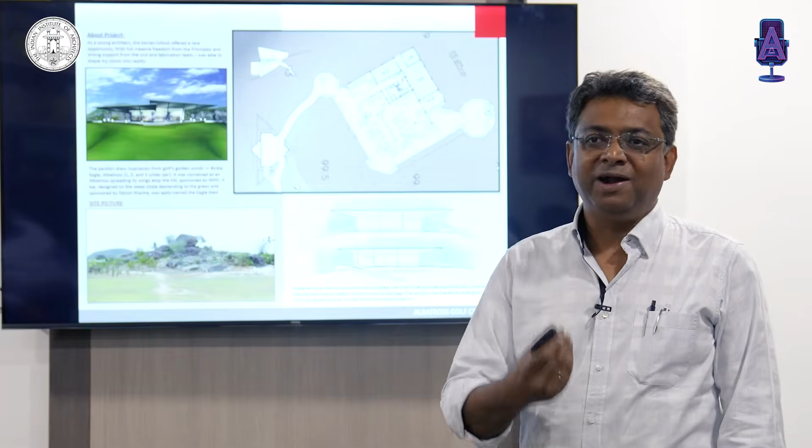So there are three golden words in golf: birdie, eagle and albatross — one below par, two below par, three below par when you are scoring. So this pavilion was designed as an albatross spreading its wings on top of a hillock, depicting the topmost score in golf, the albatross. It was sponsored by IMFA, and there was a small bar also which was sponsored by Falcon Marine.

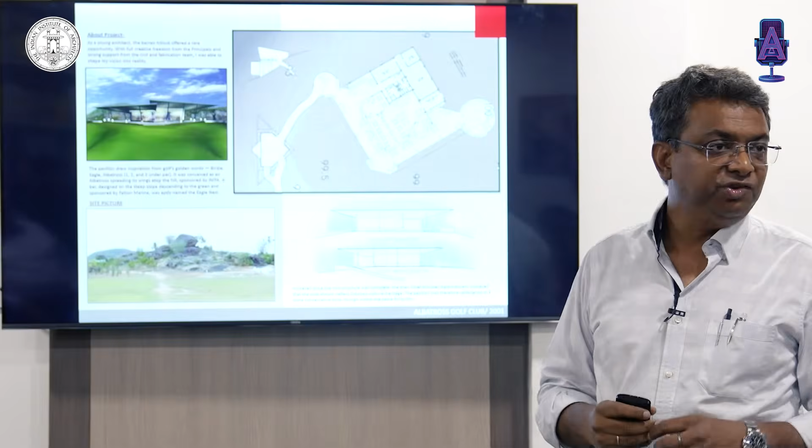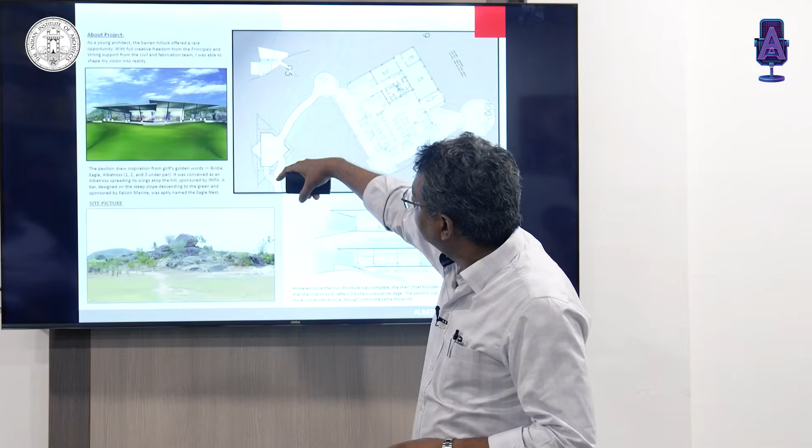So when we designed this, we had the albatross on the hilltop and a pathway going down the hill which led to the bar, and we named it the Eagle's Nest. Falcon is a brand, it's a pedigree of an eagle, so it's an eagle's nest. This was constructed, foundation was built, everything was built.

The then Chief Minister wanted to see the drawings and he said, don't you think a club should have an Odisha architecture heritage linked to it? When I was young, we used to think wild, we were creative. Slow down — once I finish the presentation, I'll tell you what has happened in the last 25 years. We have lost our creativity. We have lost the zeal to experiment, to gamble.

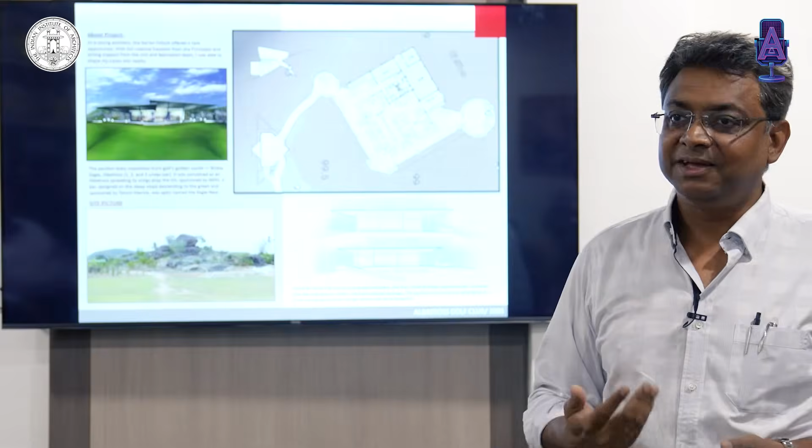That should not happen. This project is very close to our heart. Again, this is in the year 2005 when we were approached to design a house.

This is a house and the plot is 12 feet wide. This is the shape of the plot. The brief was a luxury house, parking for 5 luxury cars, 4 luxurious bedrooms, and a gallery to see

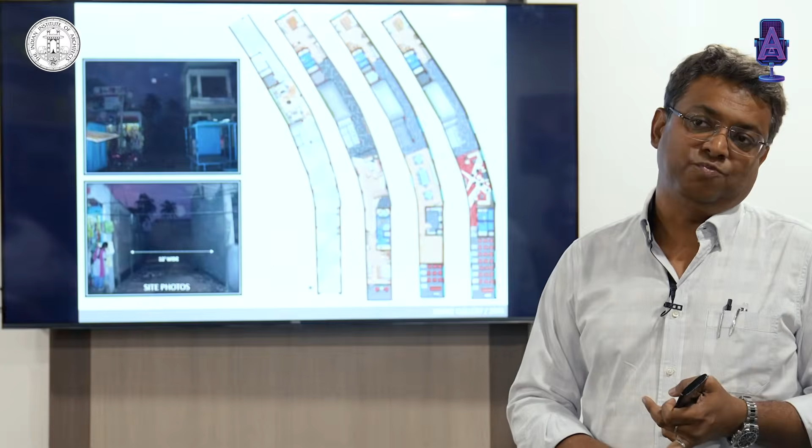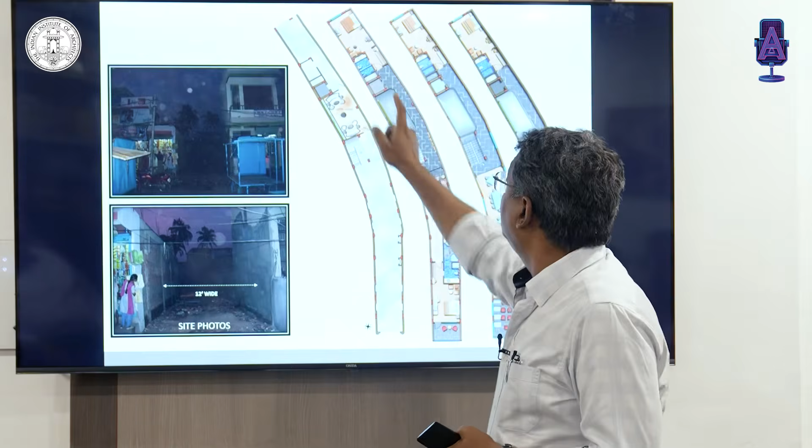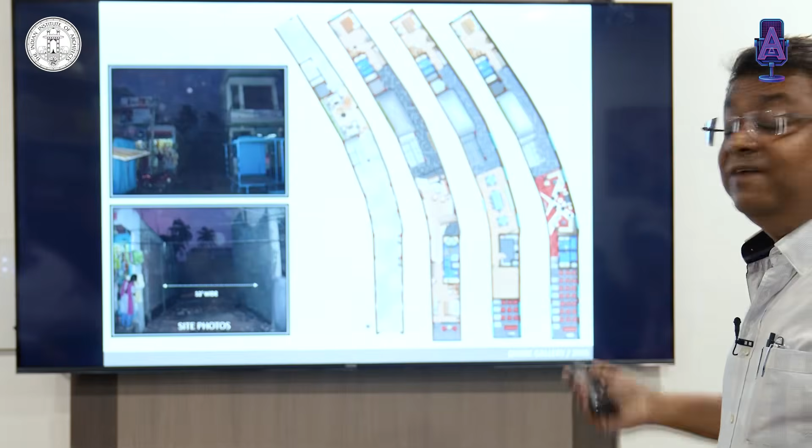A gallery to see Rath Yatra, dining space, study space and everything. We won't name any clients here, to respect their privacy. So this is what we call the divine gallery, because you are going there to see Rath Yatra.

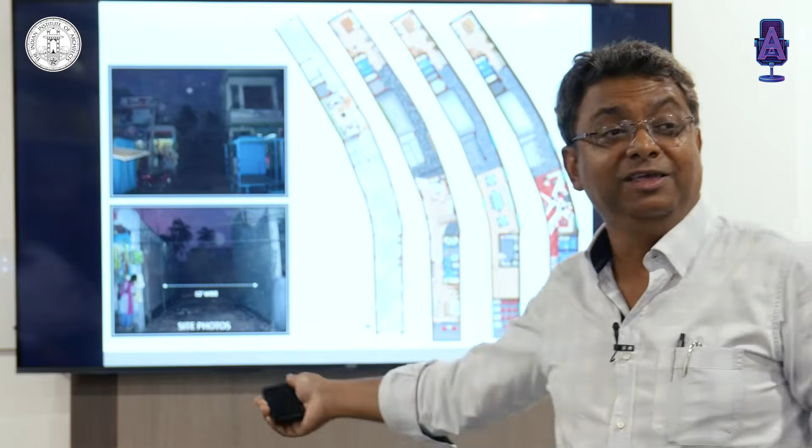This is when I was first taken to the site. The site is on a narrow road, a 'gali' as we know it, 12 feet wide. If you see the old picture, you see this building here - that building is still there. And that is the elevation, 12 feet height, 50 feet long.

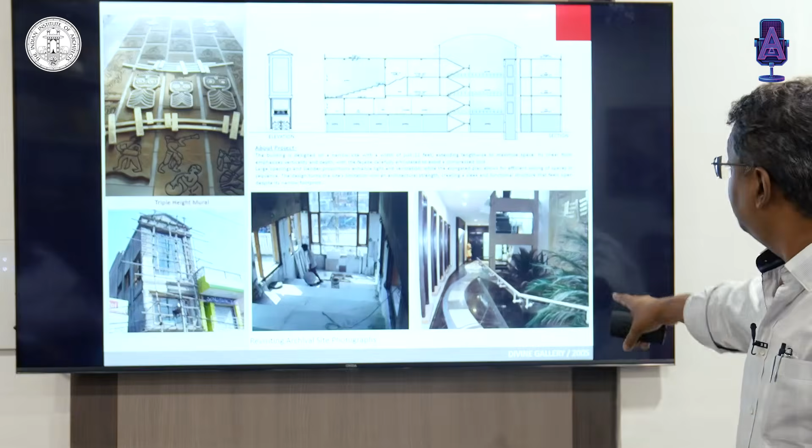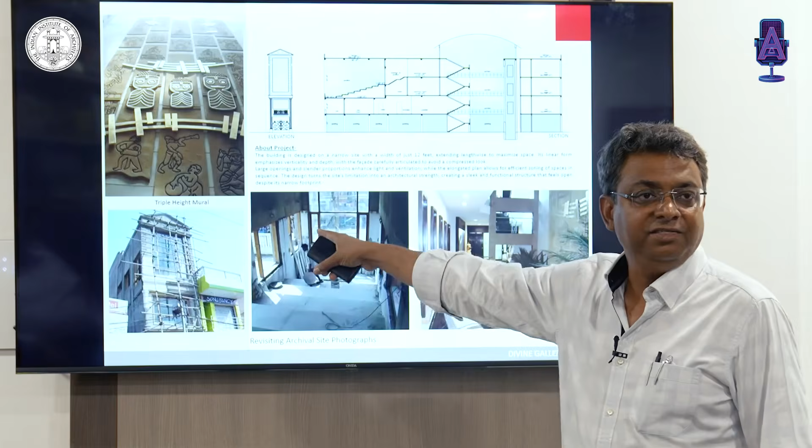This is the actual photograph, from when we did not do photo shoots. It's a triple height atrium with natural light, preserved trees. The gallery to see Rath Yatra covers 270 degrees, air conditioned with central air conditioning, gallery-like seating. And that's a mural of Rath Yatra on the triple height courtyard.

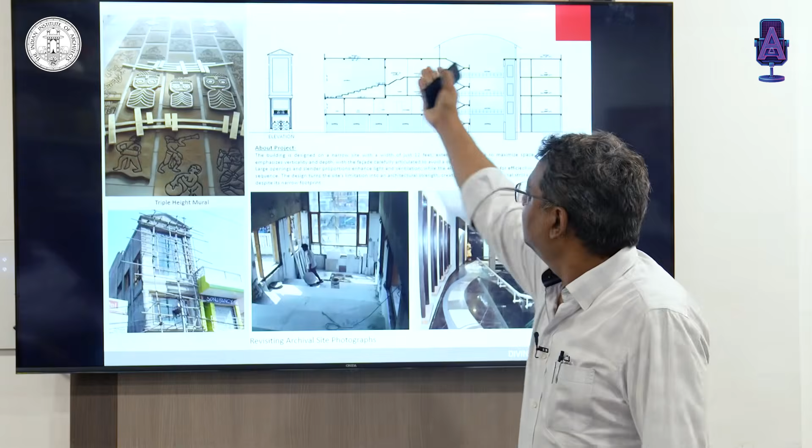The basic section showing everything there. It's 12 feet wide, a luxurious house, and we spent about 2.5 crore then.

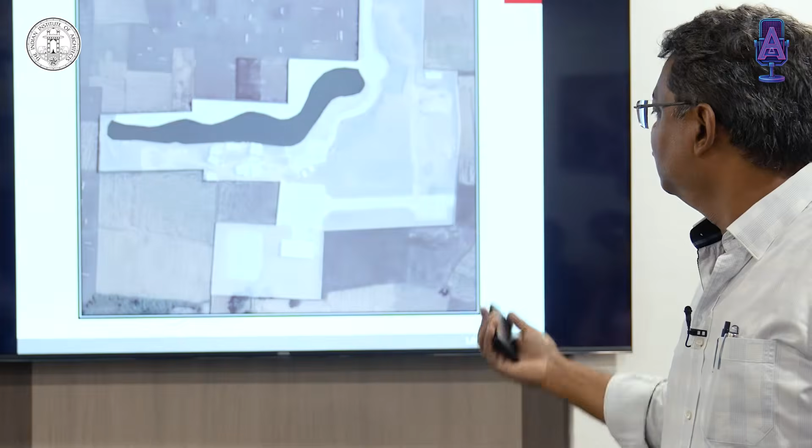This again was my first independent project as an architect. When the client came to us, it was a farmhouse near Pipli. The black thing marked is the lake. He is fond of remote controlled aeroplanes and is a vintage car collector.

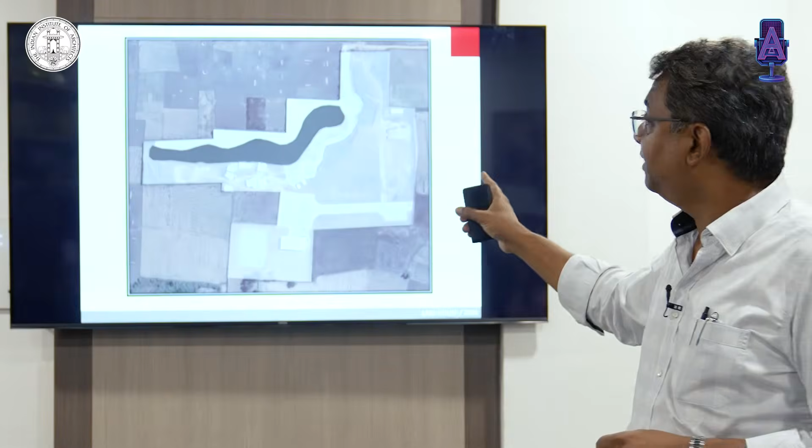So the client came to us and said that he wanted to do a farmhouse here. He said, I have dug up the lake, you have to design all around it.

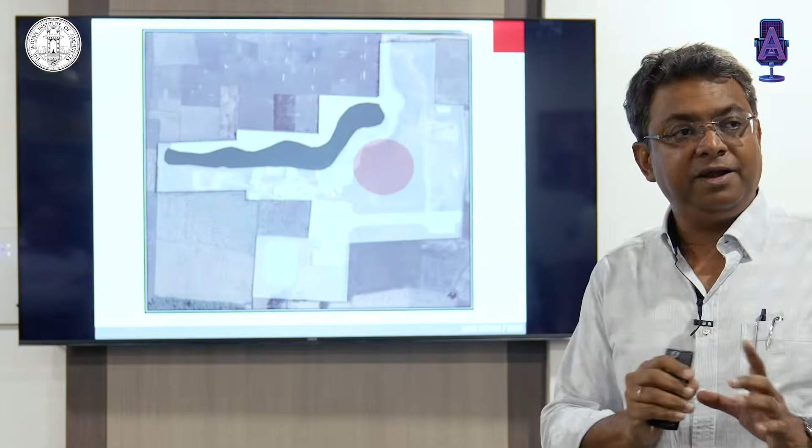So when he came, the circle marked is the area he said he had demarcated for the house. We said no, we won't do the house there. Rather, I would do the house here.

So it's a more compact space. It's easy for me to secure. It gives you that scale of a house, not the scale of a farm. So ultimately, we built the house in the area marked, with one side as the boundary wall and one side as the lake.

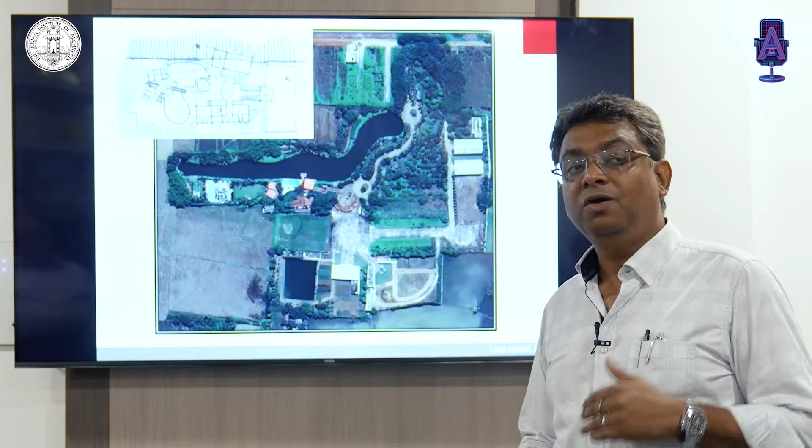The concept here was living outdoors. We get off the car, walk 100 feet to the house, all in outdoors. This was my first conceptual sketch of that place, and this is the plan of what was built.

Now, there is an entrance porch here, there is a living block here, there is a block of 2 bedrooms here, another block of 2 bedrooms here, another block of 2 bedrooms here, and there are gardens and an infinity pool on the edge of the lake.

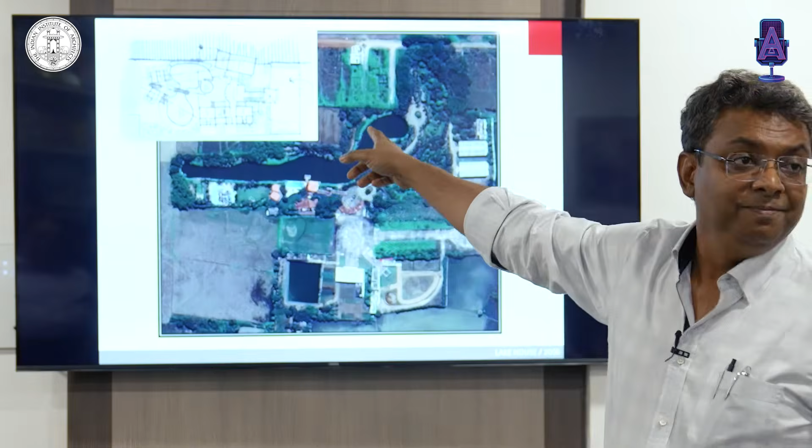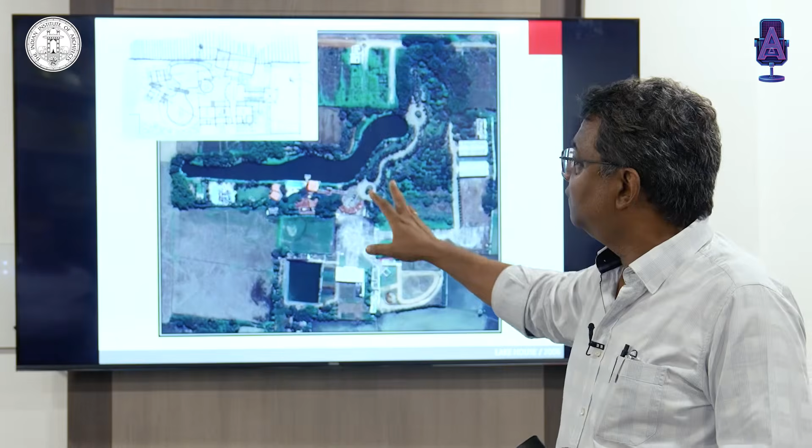So the only thing that has changed is the shape of the swimming pool. The rest everything has come up as designed. I have to give credit to the client that he let us design the way we wanted to. The swimming pool was only changed because he wanted his green space to socialize and party.

So this is what I say, when living outdoors - you get off the car, walk amongst the greens, come to a block which is your living room, then come to a block which is your bedroom, and the entire microclimate is such that you don't feel the heat.

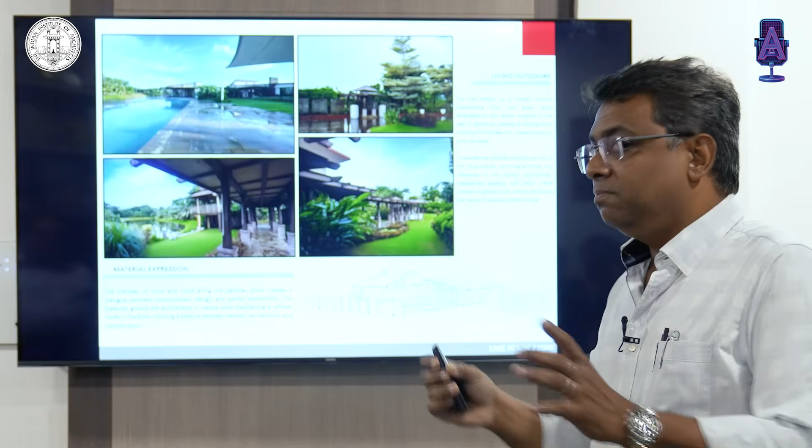Then he again came back to us in 2020 and said he wanted to keep 6 horses there. So we want to build a stud farm. He gave us a free hand - you designed the stud farm.

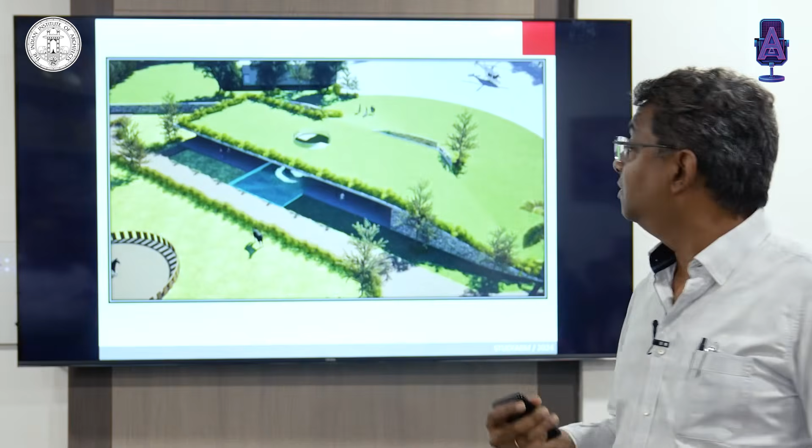It was an earth berm architecture inspired by some international architects from Scandinavia and such. If I go in front, you can see that the helipad flows up into the roof of the stable. There is a lounge on one side, 6 horses on one side, and the veterinary and tack rooms etc. on the other side.

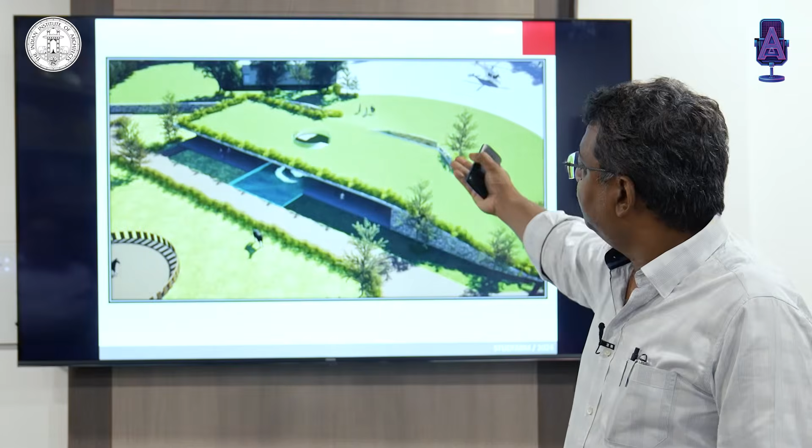So you can actually walk up to the roof and take the sculptural steps down over a water body to reach a living space and the 6 stables. This is what you see from the other side, and from the farmhouse side you see nothing - it's just a green berm going up. So this is what you see from the other side.

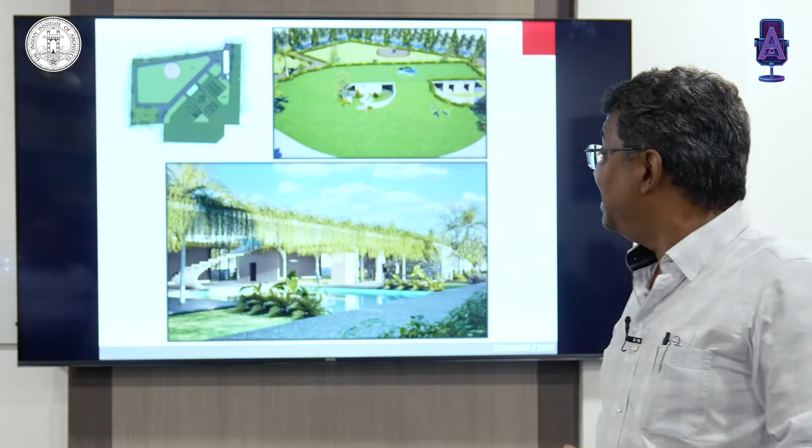The irony is what was built. So when we designed this, COVID came in, the economy went down.

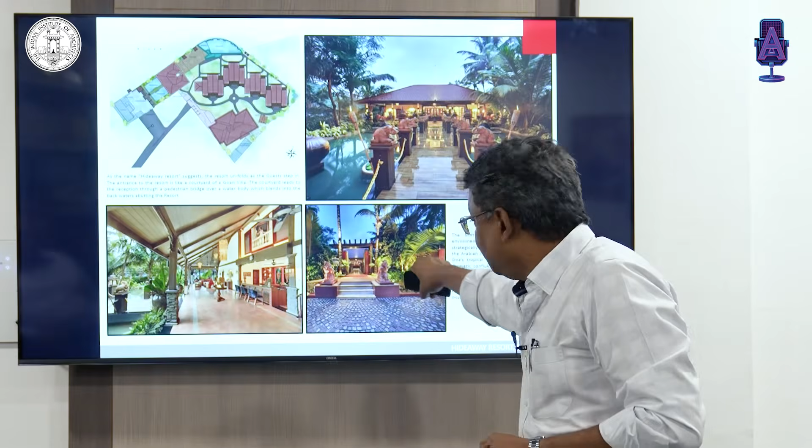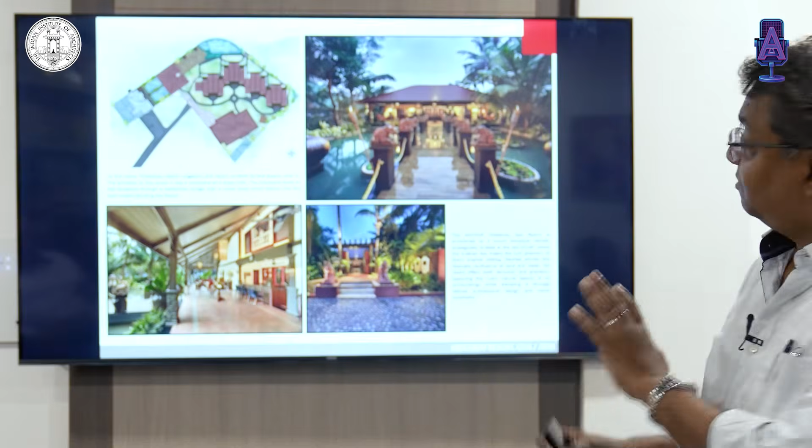Those are windows. Portuguese windows did not have glass, they had mother of pearl, so the light comes in through mother of pearl. There's a real mother of pearl paneled window there too, but that is actually my fire pump room.

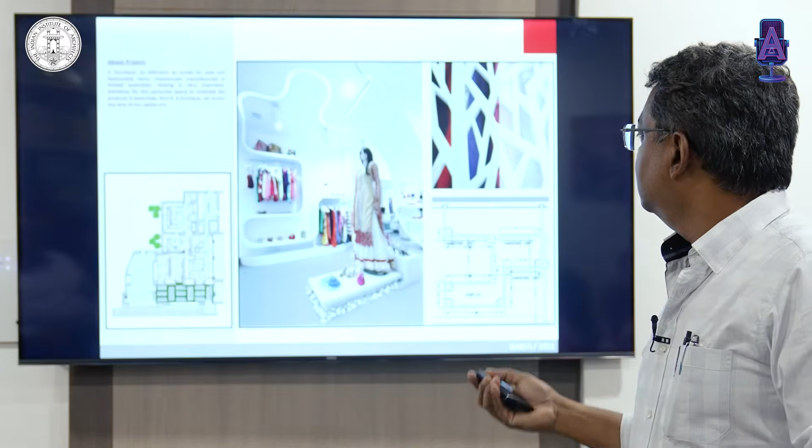This is another project we did in 2011. Although we had Corian material here then, there were not many people who could do thermoforming in Corian, so this was built in flexi-ply.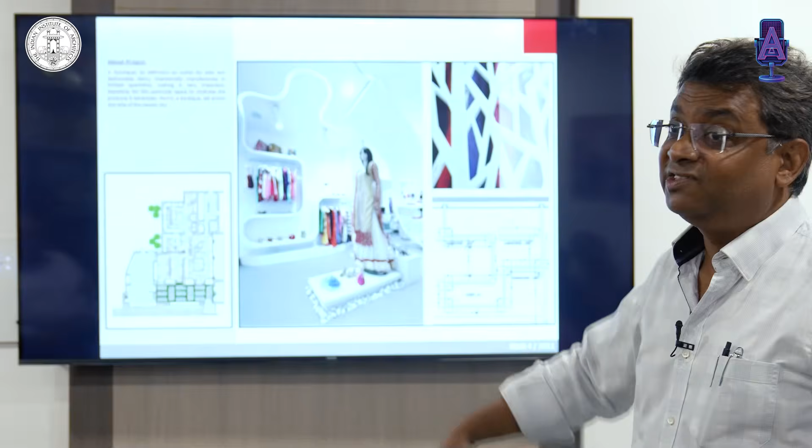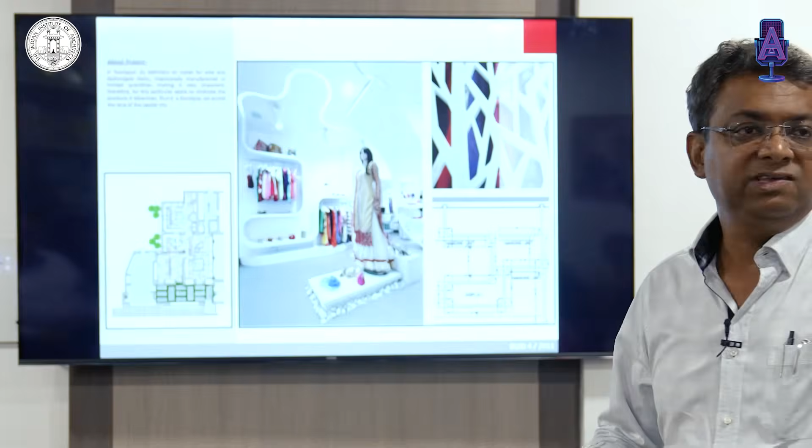This concept was entirely on infinite loops. Each and every line went up, came down onto the ceiling, came down to the other side to become a rack. So you can see there's infinite loops everywhere. This has since shut down.

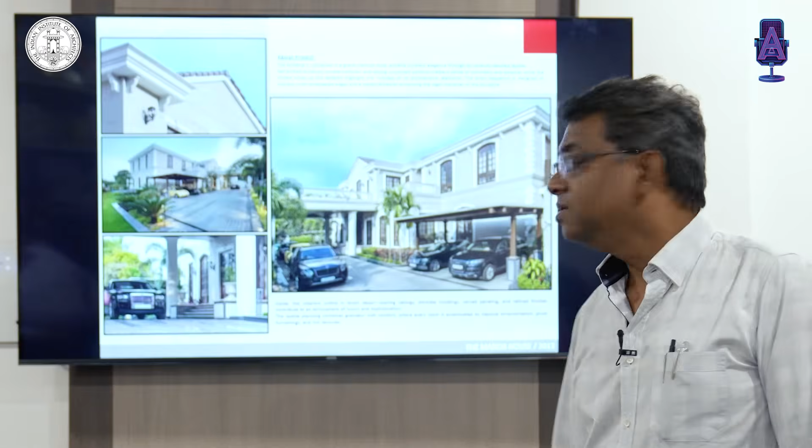This is a house we did in 2013 next to Governor House. We call it the Manor. This is on half an acre of land.

It's designed in an English style where everything looks rearward, as in 10 Downing Street, the Prime Minister's house of UK. Only the main door is visible from the front path, with everything else set back.

We were pretty bold in designing this. My floor to floor height in 2011 was 14 feet, doors and windows were 9.5 feet. So lintel was 9.5 feet, roof was 14 feet.

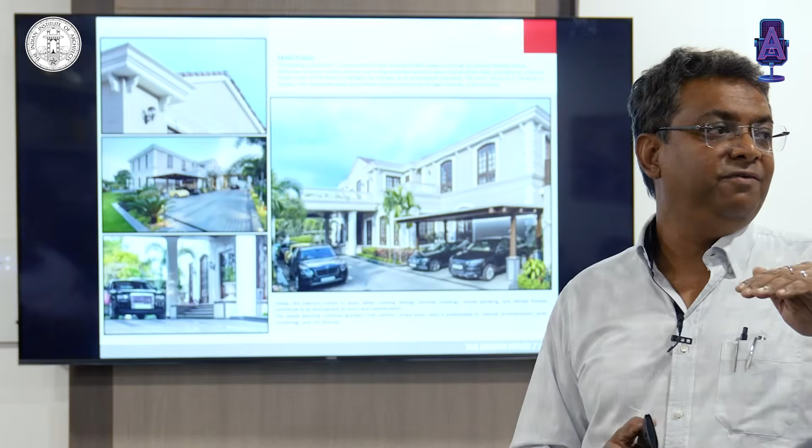The total height of the building is 50 feet but only 2 floors, because of the slope with 30-degree angles going up. This is what we call the rearward looking design.

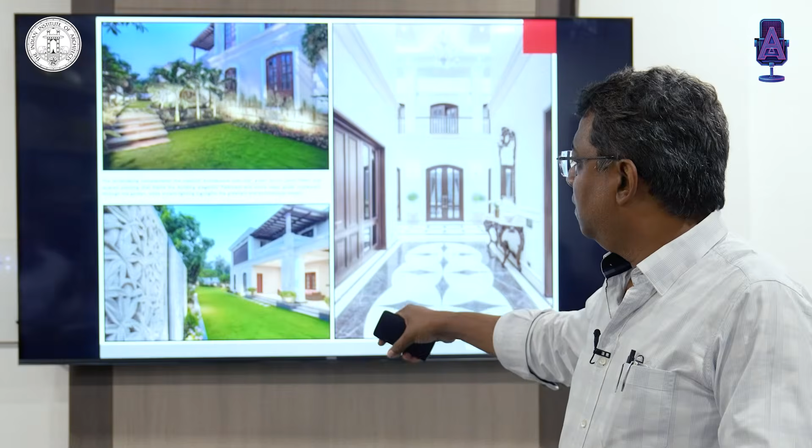There was a pool, but that pool went off during construction. So the entire house looks to the garden in the rear. You can see the volume inside, height is 50 feet inside.

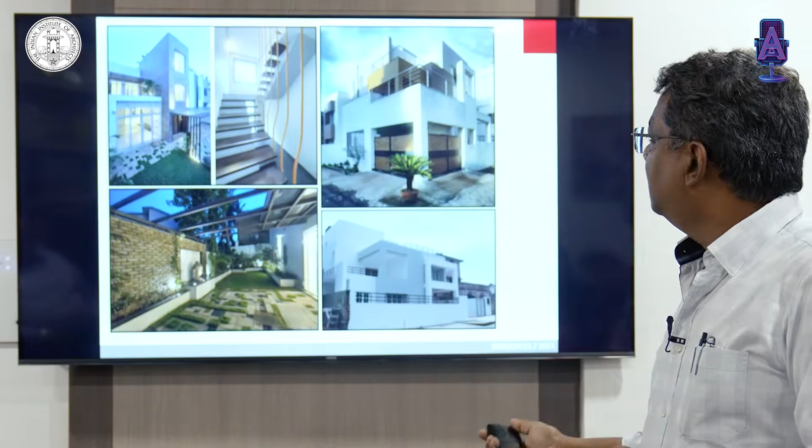These were some residences we did along the way. We are very satisfied with the elevations, pure massing, no materials. We right now feel that there are too many materials in the market.

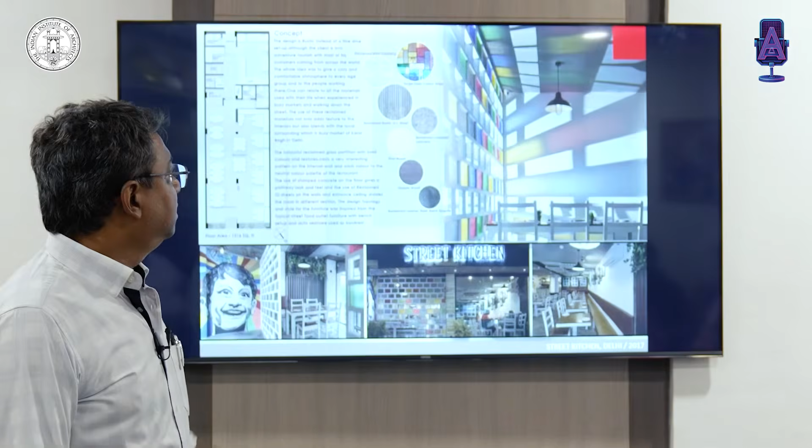They say that if you give a fish to someone, he eats for a day. You teach them fishing, they will never be hungry. This was done by an NGO which actively works against human trafficking. They rescue kids who have been kidnapped and trafficked, and then they teach them life skills.

So they built this restaurant to get them here, teach them cooking, waiting on tables, and other food and F&B related activities. So we try to keep it simple.

I mean, they are picked up from the streets. Some are beggars, some are pickpocketers, some have been rescued from prostitution. So we try to keep it very simple, with some rustic materials so they feel at home and start learning new skills which they can use further on and get employment at a later date.

So we call it the street kitchen. This was renamed again as Kitchen as a Cause.

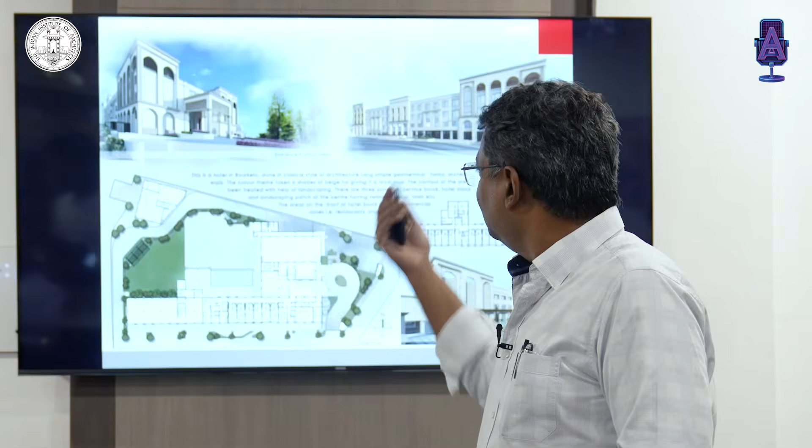This is the Pahadi Hotel we did in Rourkela. When we came on board, it was called Pahadi because it was a hill.

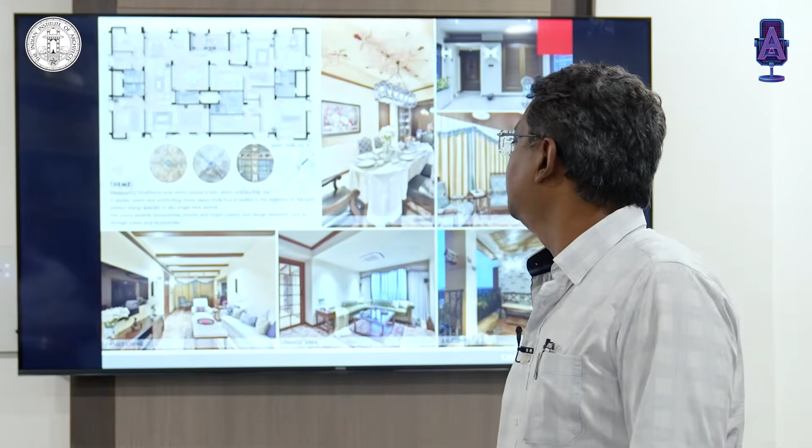We delve into interiors, we try to do some experimentation in interiors. So this was a project we did in an apartment, joining two flats together.

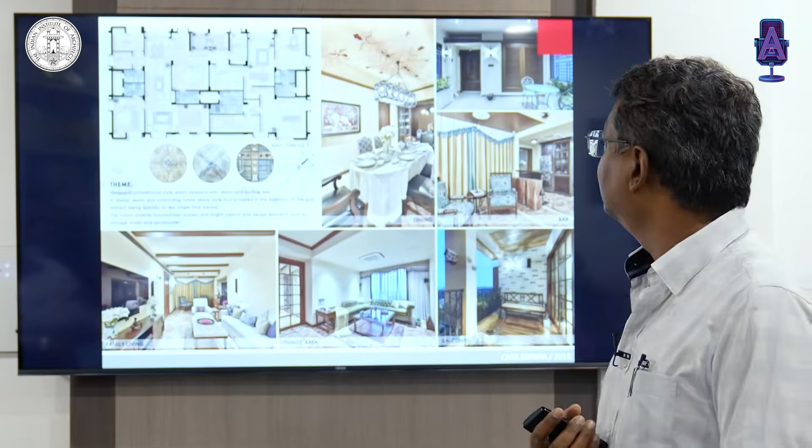The client wanted a complete Spanish interior, so we did a lot of research. Swati put in a lot of effort looking into Spanish designs, motifs, and styles. So there was a lot of stenciling and artwork done.

You see there's artwork done in the false ceiling. We got an artist who could do that.

This is a residence which we did in Rourkela. We call it the linear house. A lot of lines in that house.

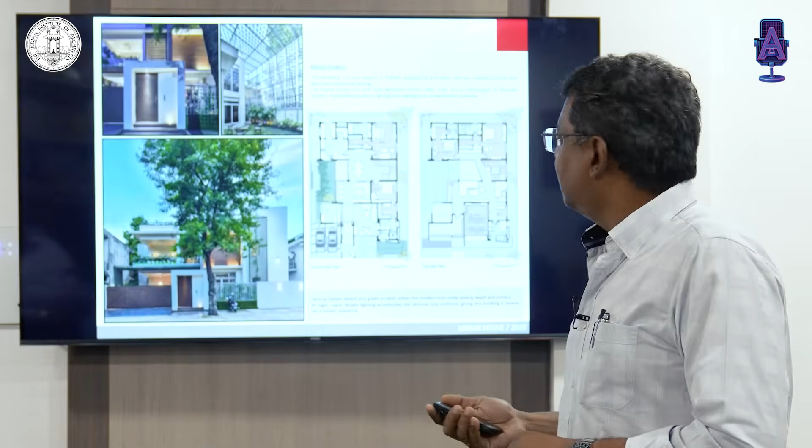Rourkela being a hot, humid climate, has a courtyard amongst itself. The entire house overlooks the courtyard inside. All 3 sides of the house overlook the courtyard.

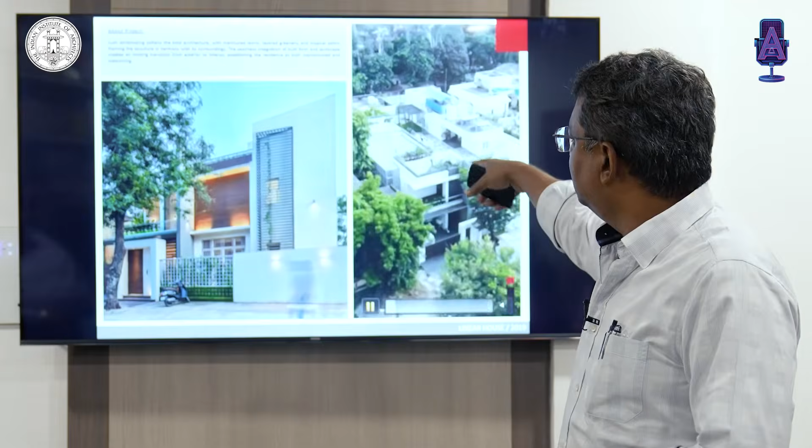You can see for security, the courtyard is completely covered by a CNC mesh grill. Large glass panes with no security because everything overlooks the courtyard, so it is secure.

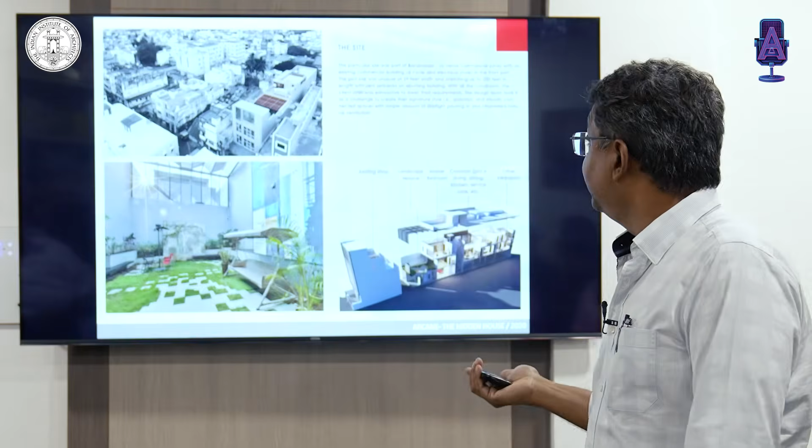Most people have seen this project. This is a house which we did in Berhampur. It has no windows - I mean, I'm exaggerating. It has only 2 windows.

So you see the photographs - these are actual photographs. The entire area in the house is naturally lit. We have a glass panel door of 20 feet height, a sliding door.

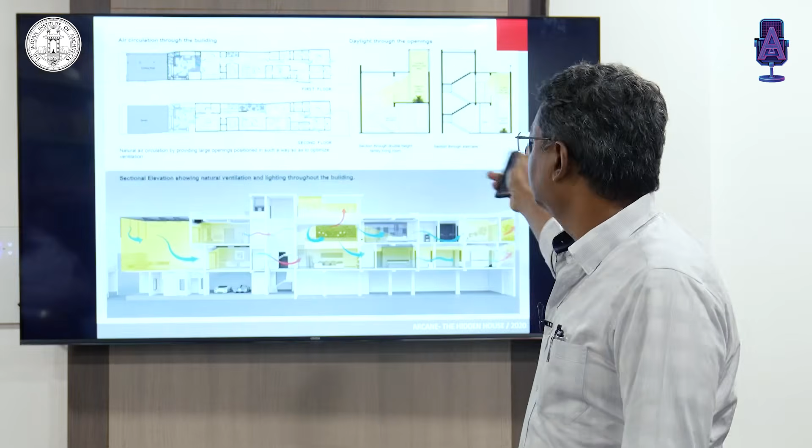In 2020 - this took a real long time to build. We started this in 2013. So this is how we are getting in light from the courtyards and cutouts all throughout the house, and ventilation all throughout the house. This is a cafeteria we did for an ITES company.

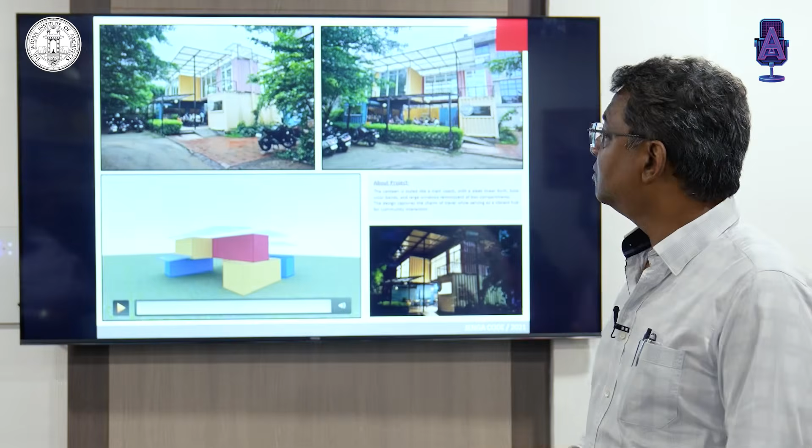So these containers are arranged so they give you shade, different uses. The inside area is a center area, though they use it for functions, events and everything. There are 2 levels of sitting areas, open terraces, covered terraces, air conditioned space.

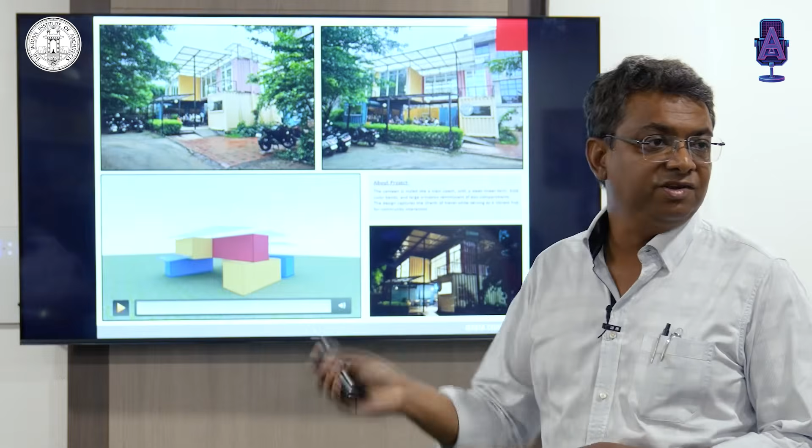There is a pop-up counter here, a proper shop front. So it's a multi-use project. This belongs to the company of a very dear friend of mine.

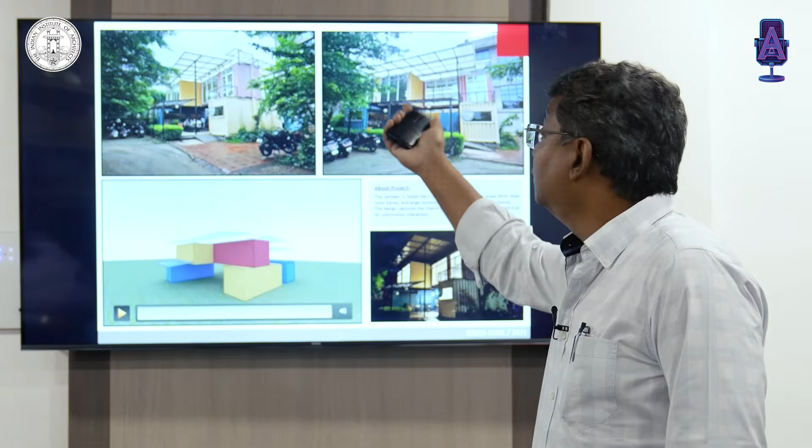So we have the freedom of designing whatever we want, and we arm-twist them into doing what we want. So this cafeteria you saw is somewhere here. So there's the entire complex. The land is like that, and the northeast is cut.

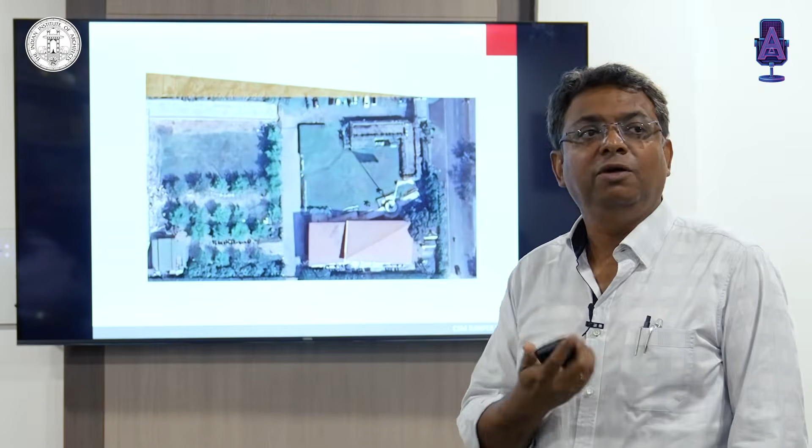The space is at the highest end about 16 odd feet, and at the lowest end is, you can see, 0 - it's a triangle. So we came up with the snake as the walkway, you go there.

So you park your car and it's an IT complex. You do not know there is something inside. Until and unless you are invited, you cannot go in there.

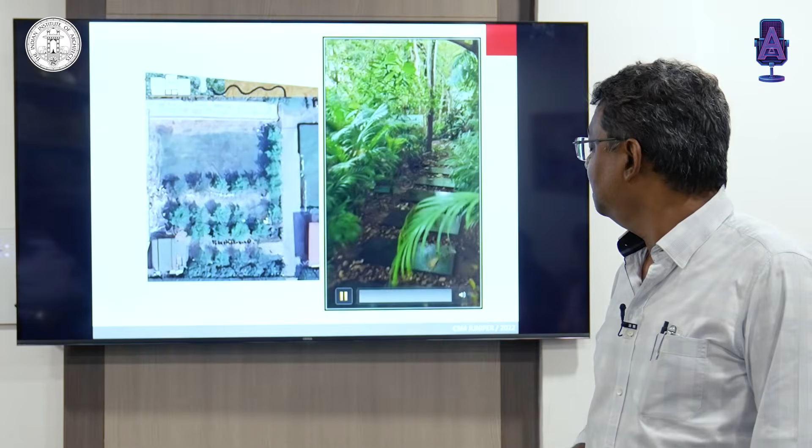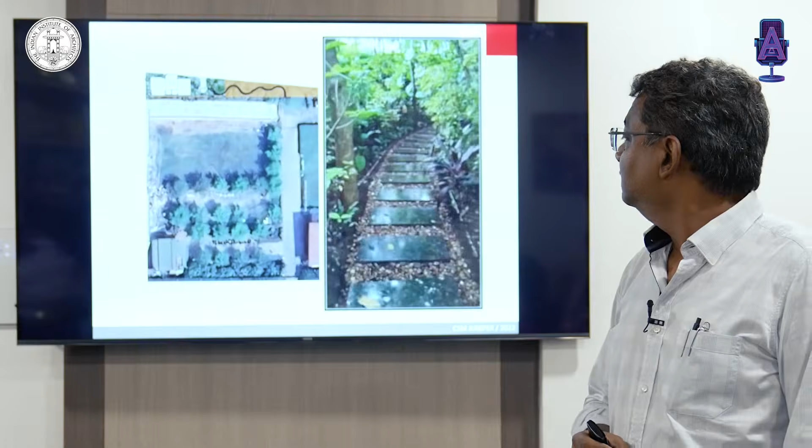So we have a small video which shows you the pathway. It's a rainforest, complete rainforest experience, with a meandering path and a koi pond.

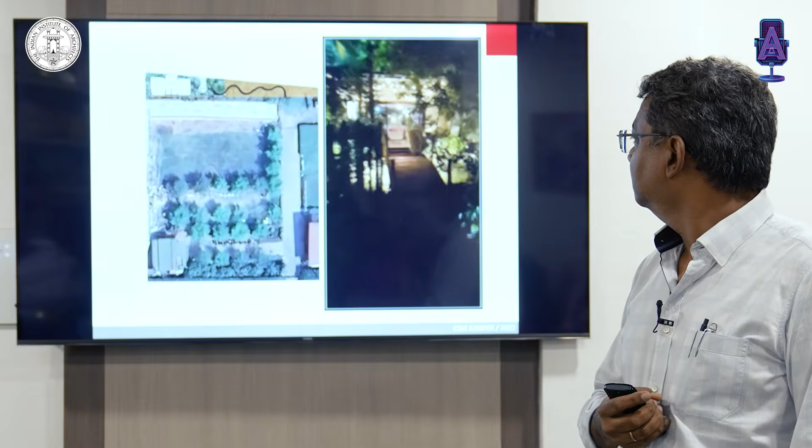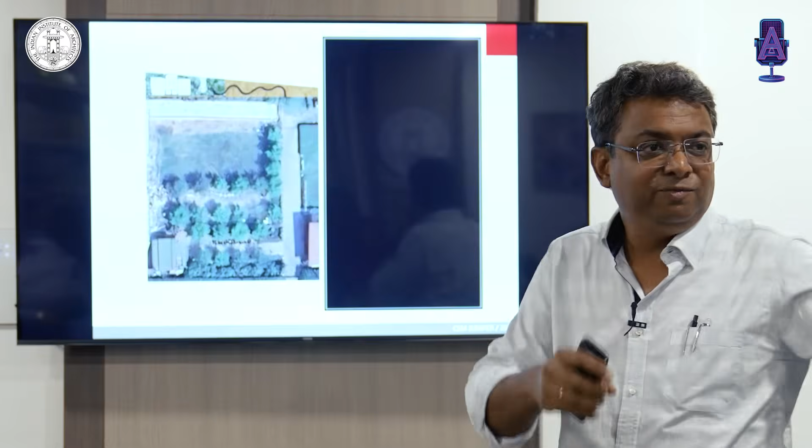So this is what it is inside.

There is a dining space which is also used for impromptu meetings for heads of companies. There is a small bar for evening social gatherings. There is a kitchenette, there are toilets. This is the most used space.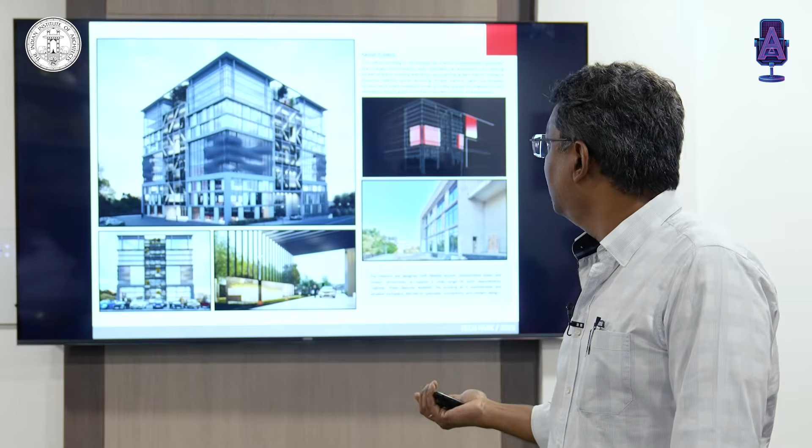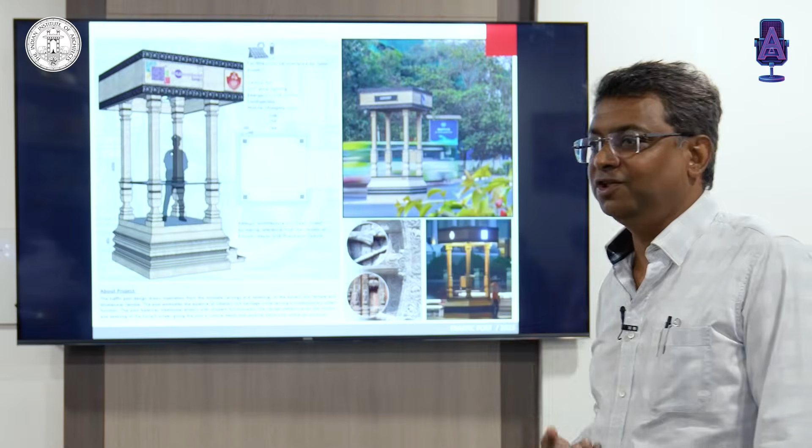Everybody must have seen this one. We have designed this pro bono - the police commissioner said we need to do something before the Hockey World Cup, to leave some mark in the city.

We do a lot of work for Cargill all across the country - their inclusive facilities, their offices, their factory layouts.

This is a project we are still doing in Dalhousie. This is the last project we completed - a small, very small house on 10,000 square feet of land in Forest Park. The house itself is only 2,000 square feet.

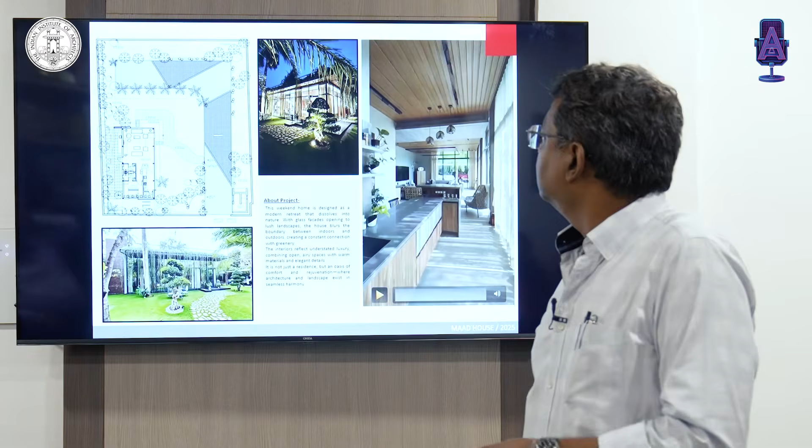It's a 1-bedroom studio unit. It has all facilities. This was again a steel structure - everything is temporary, just built up and used for socializing.

We do not show any projects which are under construction. You will not find our social media with 3Ds at all - zilch, zero. So this is the first time we are showing something which we are working on. Otherwise we do not show it to anyone - until we actually build it, we do not post it.

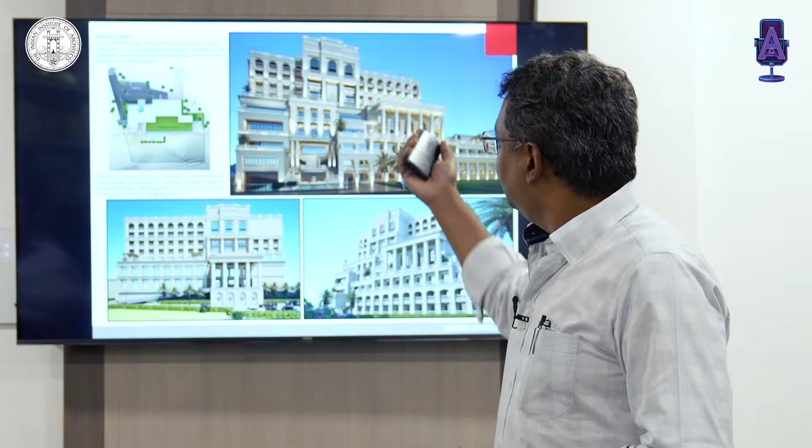If it won't happen, then let's include it. This is a hotel we are drawing in Gopalpur, called Marina Waves.

This is a commercial development we are doing between Cuttack and Bhubaneswar, which has a frontage of 500 feet.

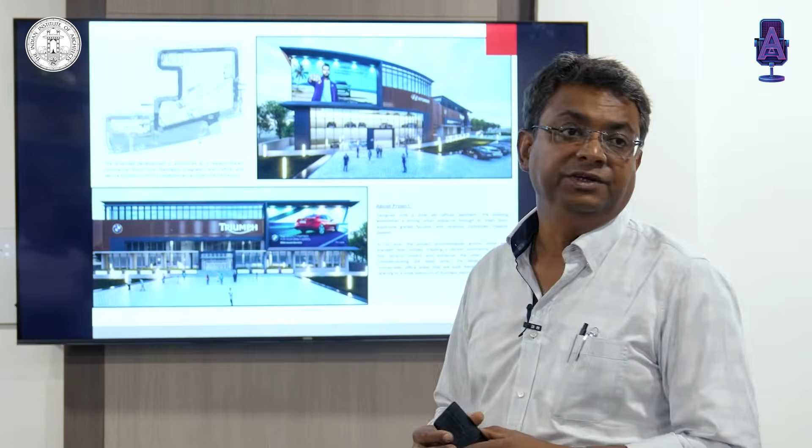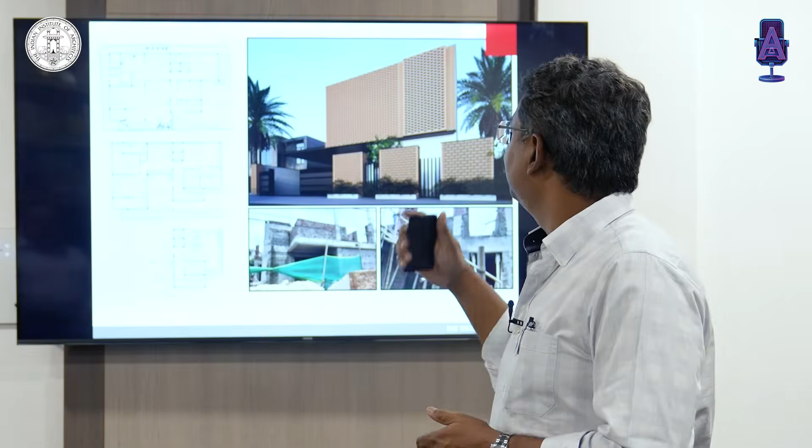The house we are doing in Bargarh has multiple layer terraces, cascading terraces with a courtyard inside, right next to Lisa's house. The house which we are doing in Rourkela is again in a courtyard concept.

So the center one is a courtyard. There are no windows in the front. The entire house is inward looking. The courtyard is climate controlled, and Rourkela has a very hot and dry climate, so you do not need to use air conditioning much.

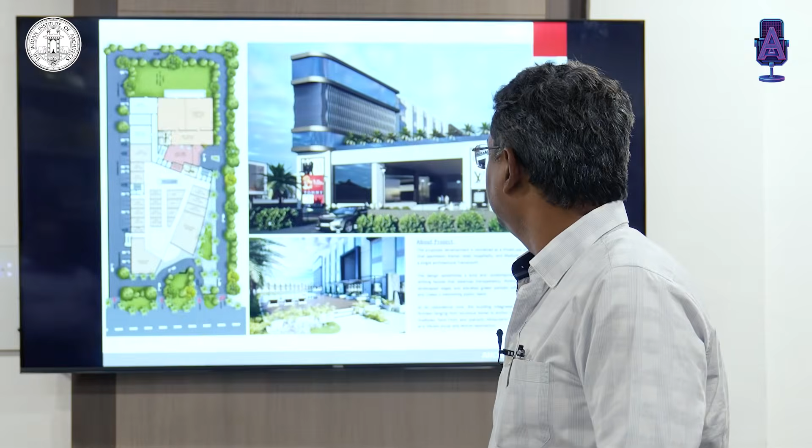This is a multi-use development we are doing in Paradip. We call it the Anchor Marina because the hotel floor is based on the anchor shape.

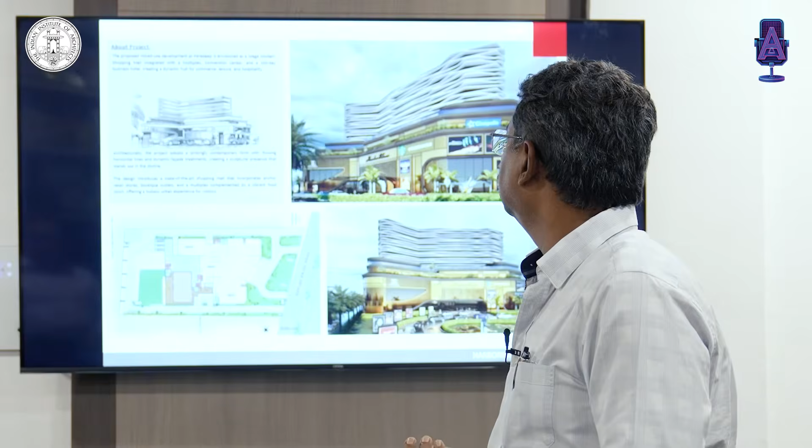This again is another mixed use development, Harbour Wave, by a Marine Drive somewhere. We are trying to delve into iconic structures.

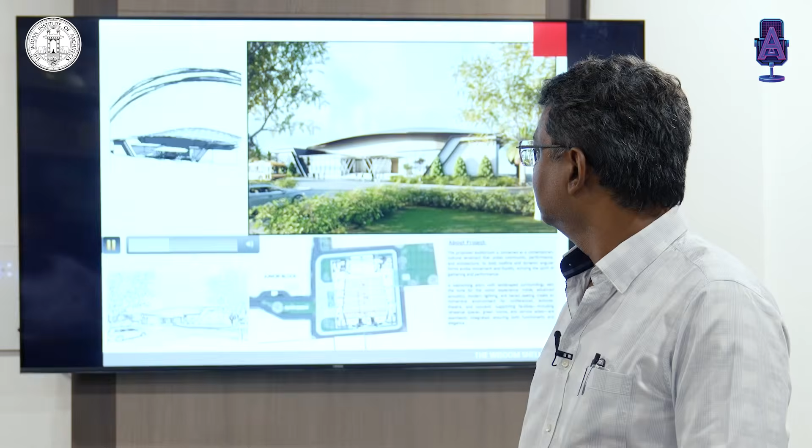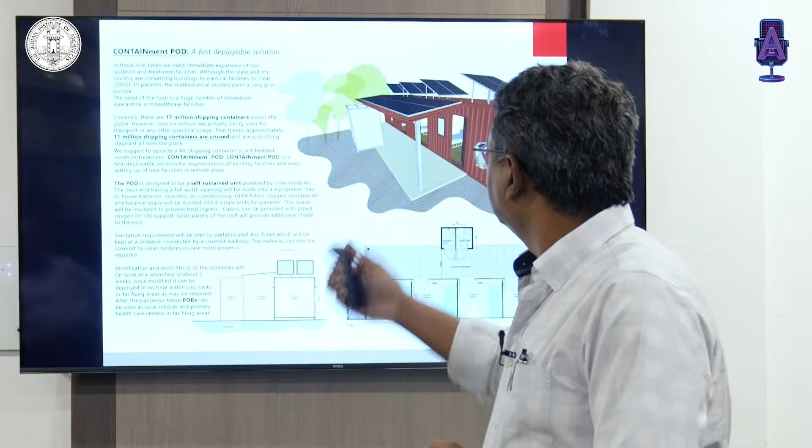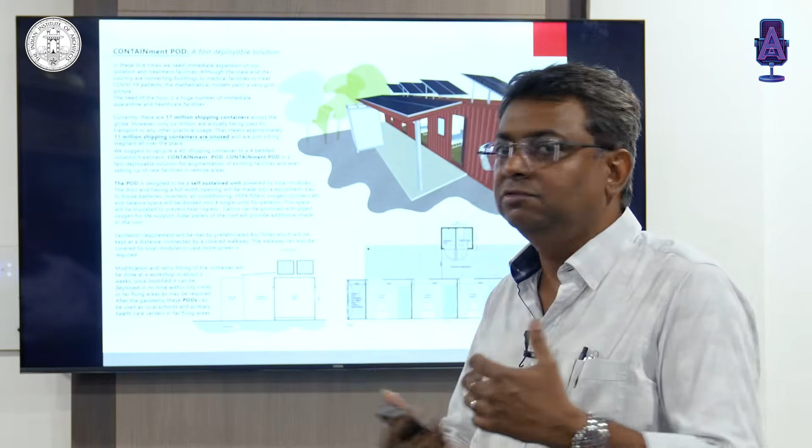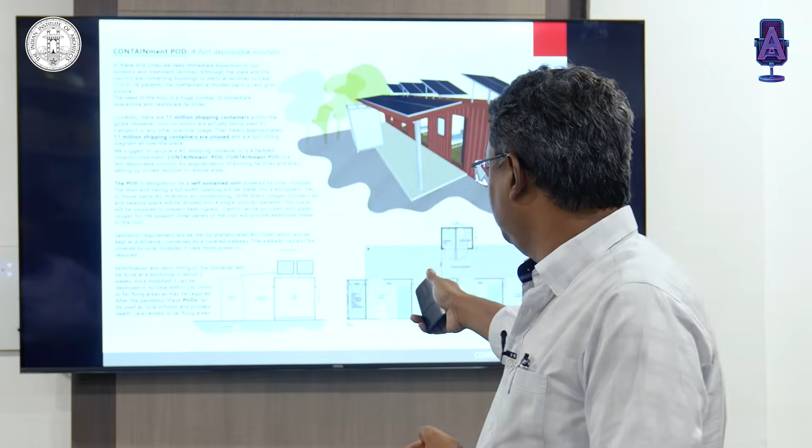We designed something during COVID out of unused containers and railway coaches for primary healthcare centers. We call it the containment pod because it's all about quarantine and having fast deployable facilities for villages. Each container had 4 rooms, an air conditioning space with HEPA filters, toilets, etc.

We designed these bus queue shelters. There is a competition with Times OOH to design bus stops in Delhi.

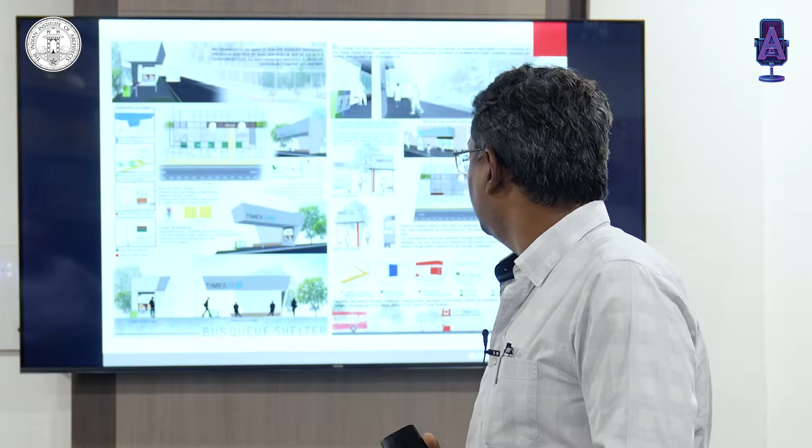I love traveling. I want to shift out of architecture, get into photography.

Thank you. Thank you so much.

So that, sir, was 28 years of just sheer brilliant work, I must say. From modern minimalistic, European, vernacular, even the street kitchen that you showed us reminded me of Soup Kitchen - it was much better designed, of course.

So now I would like to take you back to the first step. Where does an idea begin for you? Is it the client, the site? What is it? How do you start a project?

When we start a project, it is actually a mixture and culmination of a lot of brainstorming - the client's requirement, the site, what are the site's constraints. We are inspired a lot by Rem Koolhaas, who highlights the contradiction in a site. For example, you saw the Divine Gallery in Puri, where we had a 12 feet wide site and the requirement was for a luxury house.